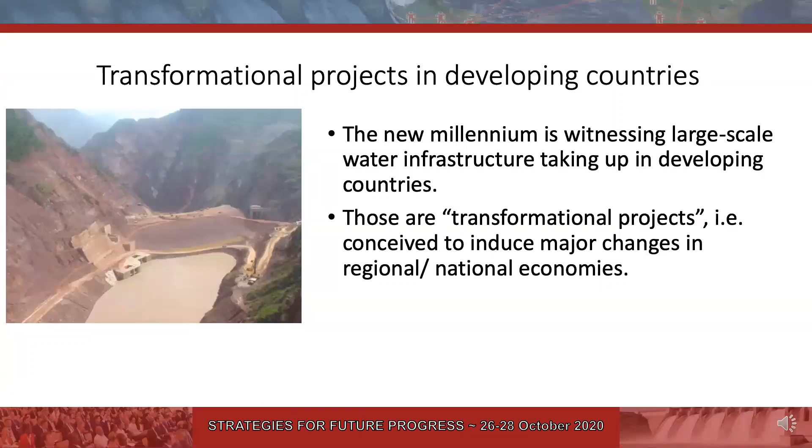To put in context the presentation that we'll hear, I have broadly divided hydropower projects in 3 groups. The first one, I call them transformational projects. Most of you are familiar with them. They are developed in developing countries the same way they were developed in last century in industrialized countries and are aimed at inducing major changes in national and regional economies.

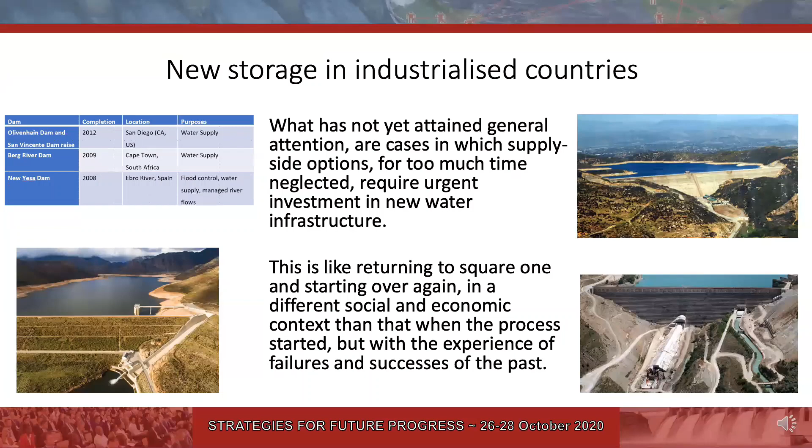Then we have rehabilitation and upgrading projects. These are mainly taking place in industrialized countries which have developed their stock of infrastructure and try to get the most of the existing one and also prolong their life. And the third group is something that is showing recently, although it has not yet attained general attention: new storage, new supply side projects in industrialized countries, after development was much neglected for a long time. We are seeing this happening more and more frequently in industrialized countries.

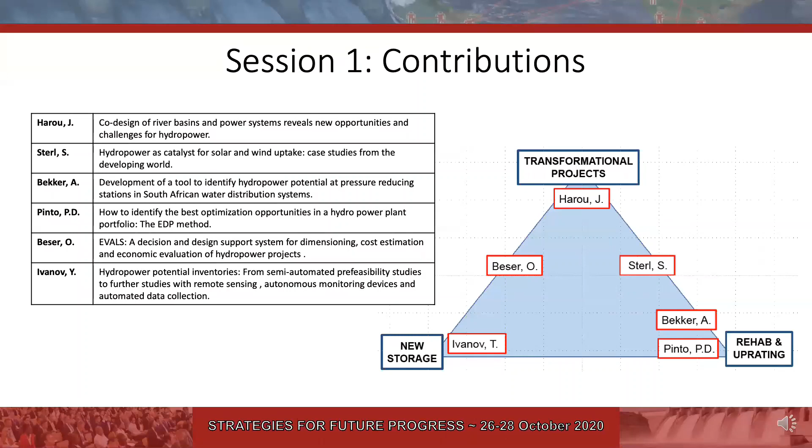And finally, I want to point out that there are other sessions in Hydro 2020 which are relevant to the subject of potential and planning: Session 3 on cross-border collaboration, session 20 on pump and storage technology, and session 40 on sedimentation management. And the relevance of this session is quite clear and is shown in this table. So I look forward to an interesting session and let's get started.

Good morning, and thank you to the organizers of Hydro 2020 for inviting us to give this session's keynote talk on new hydropower opportunities enabled by the co-design of river basins and power systems. My name is Julian Harou, and I'm joined by my co-author, Dr. Mathaios Panteli. We're both at the University of Manchester in the UK.

This work was funded by a UK research project called Future Dams. And Future Dams stands for Future Design and Assessment of Water, Energy, Food, Environment Megasystems. Its website is futuredams.org. Future Dams has 4 case studies in West Africa, East Africa, the Middle East, and Asia.

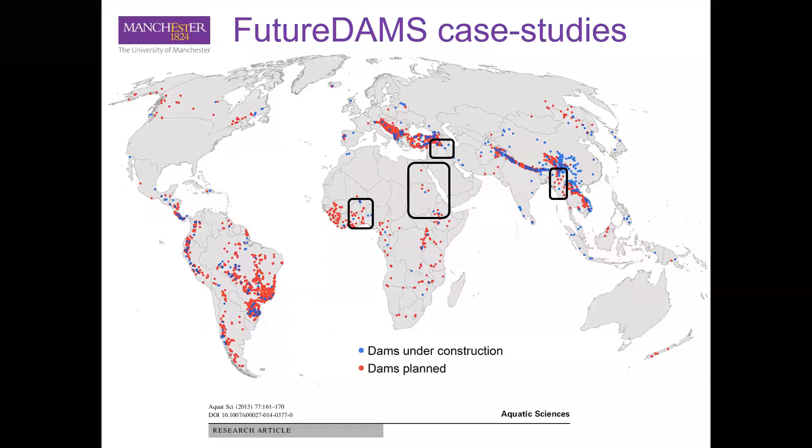So you can imagine by co-design of water energy systems, we're talking in some fashion about integrated water energy systems. Indeed, water and energy are typically managed and planned separately by engineers and planners. And that's also reflected in the mathematical models that are used to manage and plan those systems. For example, power systems models often treat hydropower as a fixed input, and water system models often allocate water to hydropower generation without considering energy needs of the system. So the temporal and spatial synergies of water energy systems are simply not considered in the tools that are used to manage and plan water and energy systems.

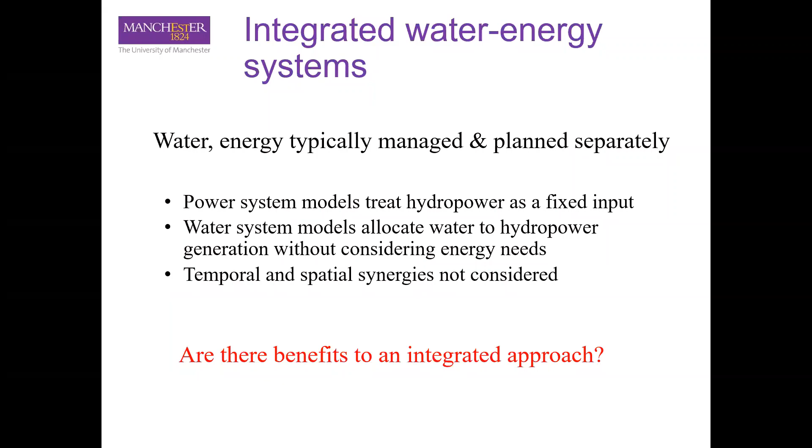So our question is simple: are there benefits to an integrated approach? This integrated approach has 3 steps. The first is to simulate spatially the water and energy system. And that means simulating the water system, the energy system, and their joint interactions. And when we do that, not only track those flows, but also track the engineering, service, reliability, environmental, and economic performance metrics that go along with them.

The second step is search, also called optimization, where we're going to try to find the most efficient water energy designs and operation modes, and the trade-offs that those imply. And you'll see with the results later what we mean by that. The third step is to deliberate, or to collaboratively and interactively assess those trade-offs and help make decisions.

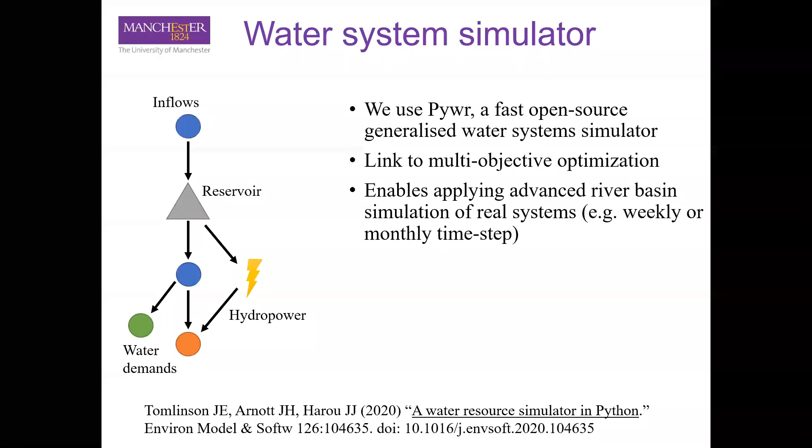Okay, let's look at some of these methods and these simulators. So very quickly, the one that we use for water resource system simulation is called Pywr. It's free and open source. You can get it on the internet. It's very fast and it's a generalized model. It links to multi-objective optimization, which is the search technique that we use. And generally this enables applying advanced river basin simulation on real systems with, for example, a weekly or monthly time step. And there's a paper below there if you're interested.

The energy system simulator is built with a similar tool. It's a fast generalized spatial power system simulator. We've yet to publish this one, but that'll come. It also links to the search. It can simulate in sequential, chronological, or non-sequential simulation. So you can do things like hourly time step, or at a more abstract level, simulate things like representative days. And it can also simulate the unit commitment in power systems.

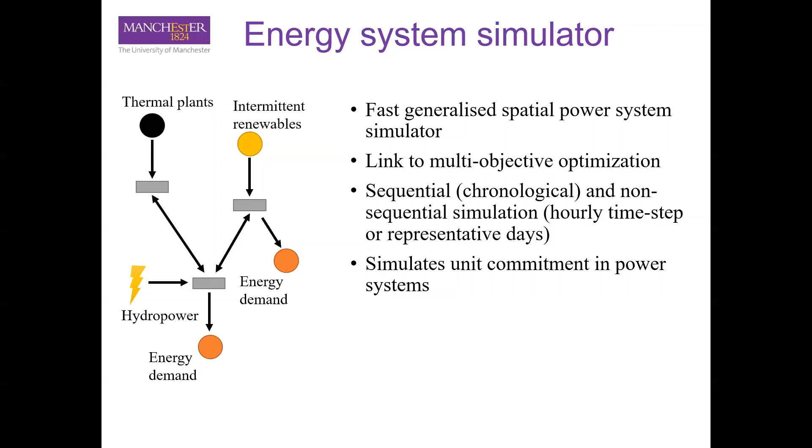Now, how do we join those together? We use an integrated object-oriented software framework that we built a few years ago called Pynsim, which stands for Python Network Simulation Framework. That allows each model to stay independent but connect at runtime while the models run, enabling multi-directional interconnections between the systems to be simulated. There's a paper that details how that works.

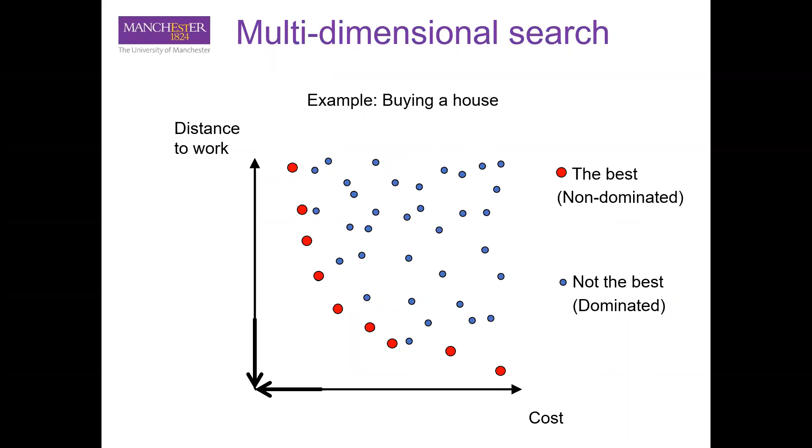This line is showing, for any distance to work, what the cheapest house is. An engineer would call that the non-dominated front, or an economist the Pareto optimal front, or it could also be called simply the best houses. This is the technique of optimization that we use in this project.

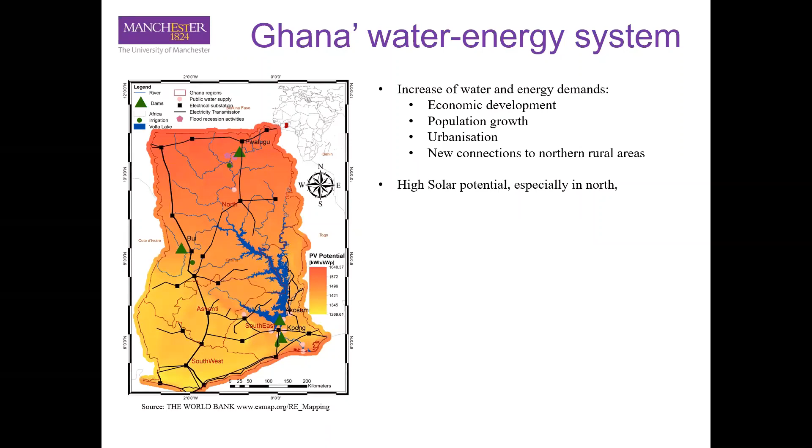An application: we've applied this recently to the Integrated National System of Water and Energy in Ghana. Ghana has some challenges. There's generally an increase in water and energy demand due to development. There's potentially quite a bit of solar potential, but it's especially in the north. The problem is that the demand is especially in the south, where the higher energy loads are. You can see there the water system and the power network in black that we simulate with the simulators.

So our challenge here is simple. The challenge we set ourselves is how to meet future energy demands while producing less emissions than today, and hopefully also lowering costs and increasing service reliability.

So for that, we're going to set up a design problem. The decisions of our problem are where to expand solar, so in which of those grid cells on the left map; where to expand the transmission lines, if at all; whether to expand the thermal generation; and what are the operating rules of the hydropower reservoirs which allow the system to work. The objectives of the multi-objective optimization problem are listed there.

You can see that we're going to be minimizing costs and energy demand unmet. We're going to be maximizing hydropower and firm yield and water supply reliability, for example to agriculture, and including maximizing flood recession agriculture.

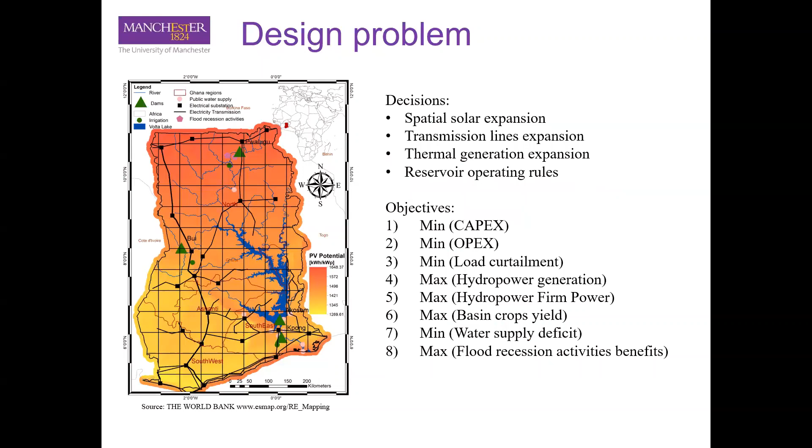Let's look at some of the initial results of this design problem. On the y-axis, we have the emissions reflecting how much thermal is generated. As you reduce that, it's because you're producing more from solar. On the x-axis, we have the hydropower energy produced.

And the color is the firm yield generated by hydropower. The reason why we're not seeing a crisp two-dimensional Pareto frontier is that we have 8 optimization objectives, yet we're looking at this space in 2 dimensions spatially and 1 with color, so 3 dimensions. That's why many of the points are overlapping.

But what we're seeing here is an efficient frontier, so all these points are of interest. To simplify the interpretation, we've tried to keep most of the other benefits roughly equal, but picked a point on the left side with 450 megawatts of firm hydropower, and on the right side, the green point, with 225 megawatts of firm hydropower. What these 2 clusters of points and the 2 selected points show is that there are really 2 ways to operate your hydropower.

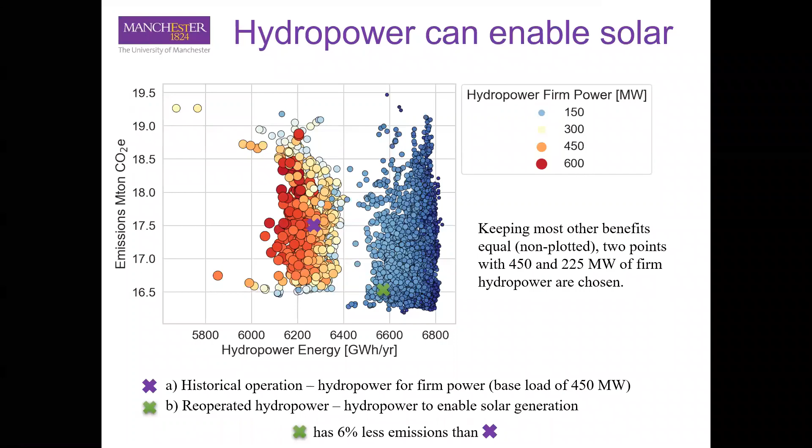The purple point is an example of historical operation, where hydropower is used for firm power to generate base load. The green point is reoperated hydropower, or hydropower that is specifically designed to enable solar generation, to support solar. And you can see here that results in 6% less emissions nationally.

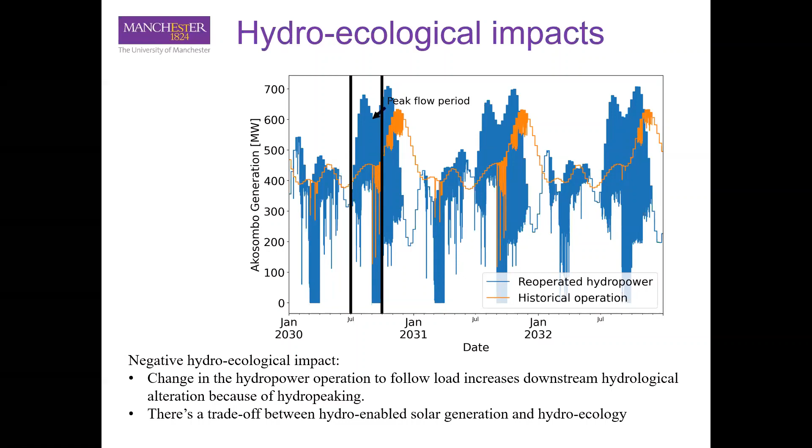In summary, we can say that hydropower allows moving water in time to respond to changes in the net load and solar availability. Such hydropower reoperation enables more solar and less thermal generation and reduces CO2 emissions. In our case, in Ghana at national scale, this was about 6%. However, so far we've seen there's an emissions reduction versus hydrological alteration, or hydropeaking, trade-off that needs to be considered and further looked into.

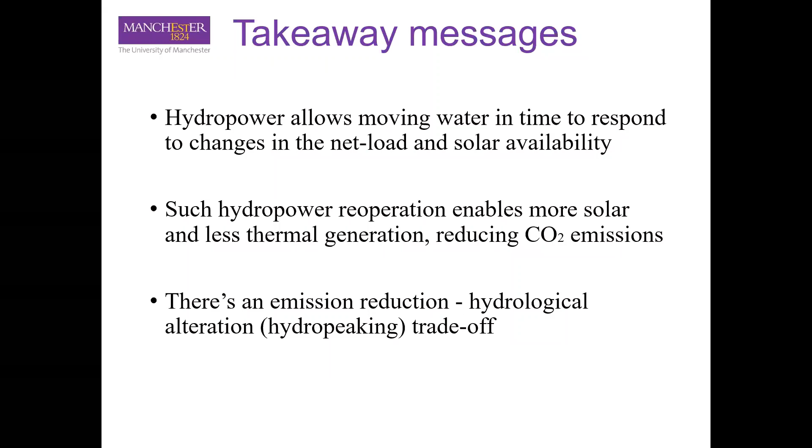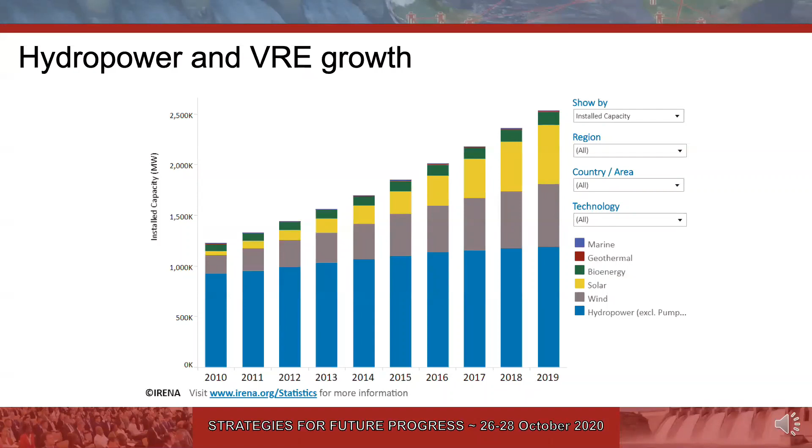To give you some context, hydropower, as many of you will know, is the most used renewable electricity resource in the world, but solar and wind power have been making tremendous advances in recent years with unexpected and unprecedented growth rates. Now that is good news for the climate, but it comes with its own challenges because these resources are variable and fluctuate depending on the weather from minute to minute, hour to hour, and season to season. Hydropower has often been presented as a way to compensate for these variabilities thanks to its flexibility of dispatch.

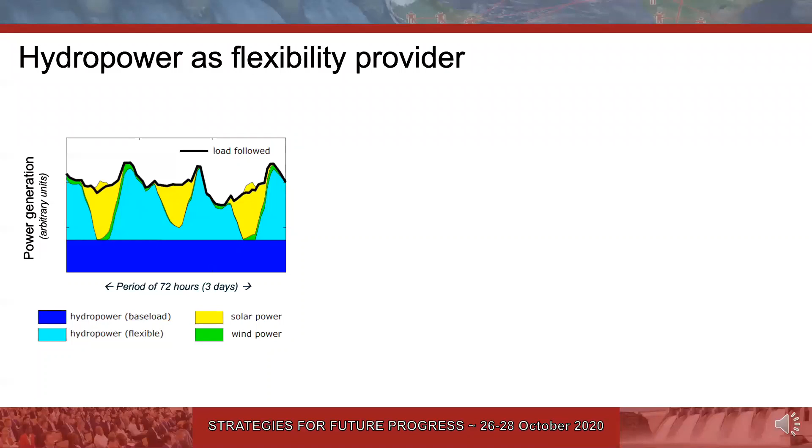Now, that on the face of it, may seem like a relatively simple thing. Just adapt the operation of hydropower plants according to the availability of solar and wind and according to the demand, and you're there. But it's not that simple. It's about more than just considering the hourly weather patterns and adapting hydropower plant operation in function of that.

Because in reality, you'll need to consider a whole range of other scales and problems to do this in a proper way. For instance, you'll need to consider also the impact of seasonality, of rainfall, of river discharge, but also of solar and wind potential on the management of hydropower plants and their flexibility, as well as the climate change signal, which pans out on decadal timescales.

Moreover, it's important to consider the environmental flows that hydro reservoirs have to guarantee in order to safeguard ecology downstream, as well as the multi-annual management strategies of reservoirs to safeguard lake levels. So quite quickly, this can become a relatively complicated problem that requires a lot of data in order to be analyzed properly. So in the department where I work, we've developed software tools to do this, and I'm going to show you the results of two specific case studies that we've carried out, which consider all of these timescales and problems in an integrated manner.

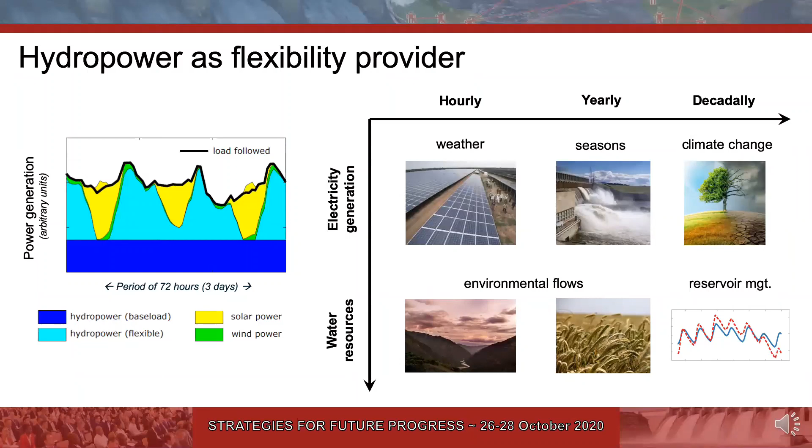The two case studies I'm showing you actually span a wide range of grid scale relevance, and they're from opposite ends of the spectrum in terms of grid size. The first case study is from an isolated island grid case, a grid that stands on its own without interconnections to other countries in a small island developing state. The second case concerns an interconnected power pool strategy across an entire subcontinent.

The first case study is from the South American nation of Suriname, a small island developing state. The second case is from West Africa, in the context of ongoing efforts to integrate national power grids into a joint West African power pool. Let's start with Suriname.

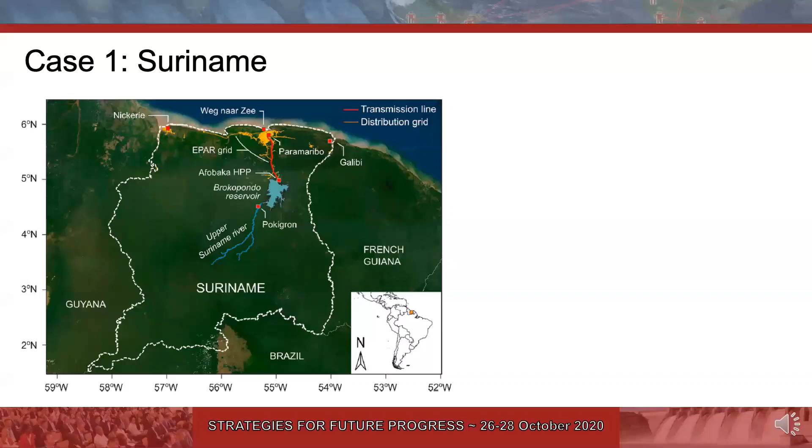Suriname is a small country along the northeastern coast of South America, which has historically relied on a mix of hydropower from a single big hydropower plant and thermal power from several diesel-powered plants. The main grid of Suriname, which serves the capital, Paramaribo, is isolated and has no interconnections to other grids. The hydropower plant was originally developed to benefit the aluminum industry, but as this industry declined, the plant was handed over to the Surinamese state at the end of 2019.

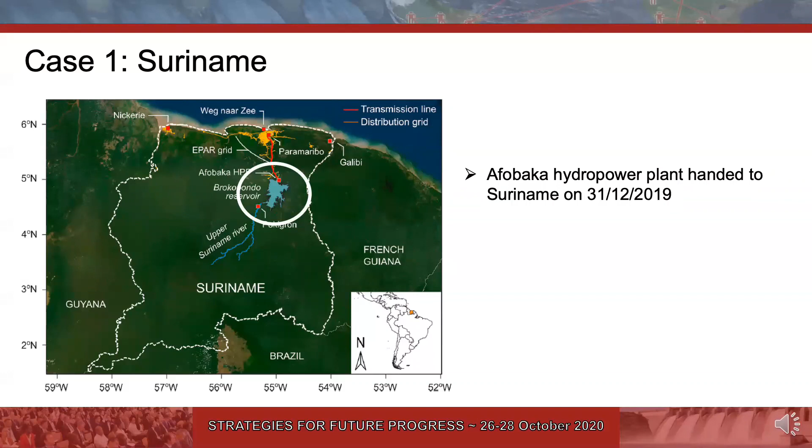So Suriname now has a new old hydropower plant in its possession, which could be put to use to benefit a clean energy transition. In collaboration with the National Utility Company of Suriname, we looked at the potential for using the hydropower plant, leveraging its flexibility to develop coastal wind power. The coastline of Suriname receives strong trade winds during part of the year, and most of the population lives there, so the transmission grid is already present along the coast. There could therefore be interesting ways of using the hydropower plant to develop coastal wind power.

It's interesting to note the complementarity between the wind and the hydro resource in the country. Wind speeds blow strongest during the dry season at the beginning and the end of the year. Obviously, the hydropower potential is highest during the wet season when the reservoir refills. So we have a very clear case of seasonal hydro-wind complementarity here, which could be leveraged to benefit the introduction of wind power on the Surinamese grid.

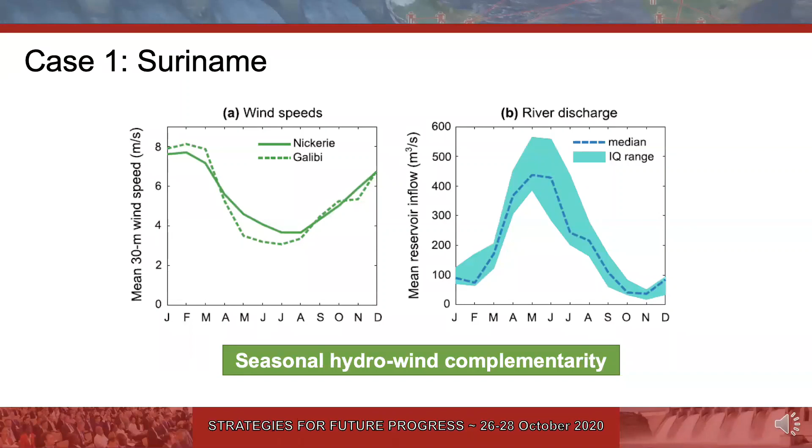Here I show you model results of how the operation of a mix of hydro, wind and thermal power to meet Surinamese demand could look like from hourly to seasonal to multi-annual scales. On an hourly timescale, our model suggests that the hydropower plant should be dispatched in certain ways, depending on the availability of wind and the total demand, in order to displace thermal power from the mix.

If you keep that operation across the year and across several years, then on a seasonal timescale you'll see that you reproduce exactly this complementary behavior, with wind power reaching up to 50% penetration during the dry season and hydropower taking up the baton during the wet season. On a multi-annual timescale, we see that the hydropower plant is even capable of compensating for interannual variability in the wind resource.

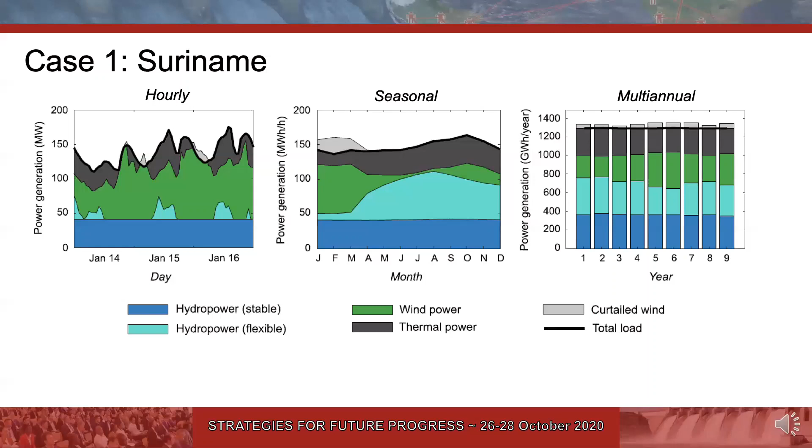After doing some economic analysis on this, we find that hydro-supported integration of wind power is economically advantageous up to around 25% of wind power penetration on Suriname's main islanded grid, which together with hydropower would mean roughly 80% renewable and clean electricity supply for the country.

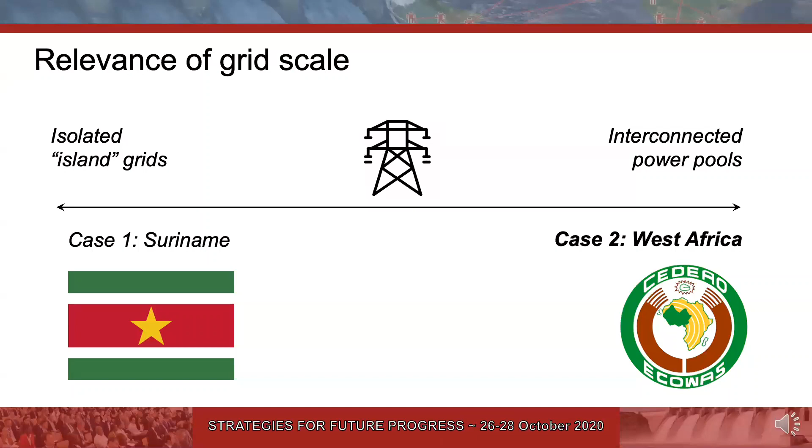The second case I'm going to show you now concerns a whole other scale of grids, namely interconnected power pooling across an entire subcontinent. The aim of this research was to look at how the ongoing efforts to integrate countries' national power grids into one regionally integrated West African power pool could best be harmonized with the need to deploy more and more clean energy projects from solar and wind power in the region to reduce the use of polluting fossil fuels, and how this could best be harmonized with the potential flexibility of the existing and also the planned hydropower fleets across the region.

So we used the same modeling approaches as we did for Suriname, but instead of applying them to one single hydropower plant and one single type of wind power project, we actually looked at the entire subregion and simulated the joint operation of all existing and planned hydropower plants alongside all upcoming solar PV and wind power plants in the region, to clarify how a regionally integrated power grid could benefit high penetrations of solar and wind power and the deployment of flexible hydropower.

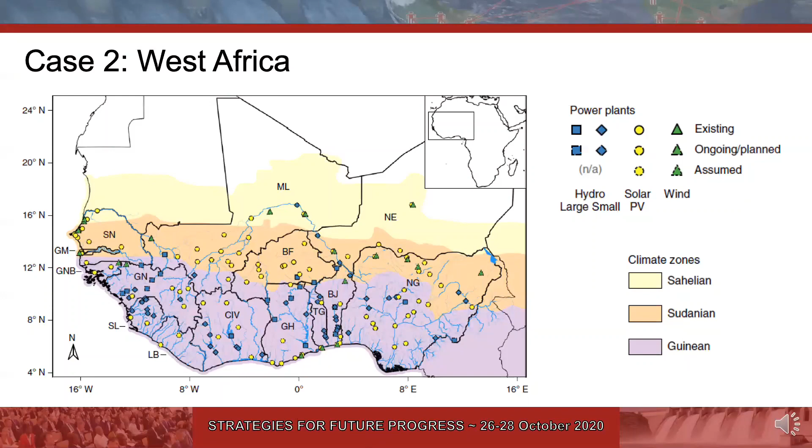And in this case, we saw that there were a whole lot of other synergies and complementarities that had to be considered. In the Surinamese case, we have one type of synergy, seasonal, between two types of resources, hydro and wind. In this West African case, there's a whole other range of synergies to be considered. We've got a seasonal synergy between hydro on the one hand and solar and wind on the other, with solar and wind power strongest during the dry season, hydropower obviously during the wet season.

We've got a diurnal synergy between solar on one hand and wind power on the other. Solar power is obviously available only during daytime, but wind power potential is actually highest during nighttime in West Africa because of low-level jets that blow at the hub heights of wind turbines.

And lastly, we've got a spatial synergy between the north and the south of the region, with hydropower potential mostly concentrated in the wet south, which receives the most rainfall, and solar and wind power potential being strongest by far in the northern, dry part of West Africa. So we could say that we are dealing here with a case of multi-scale spatio-temporal hydro-solar-wind complementarity.

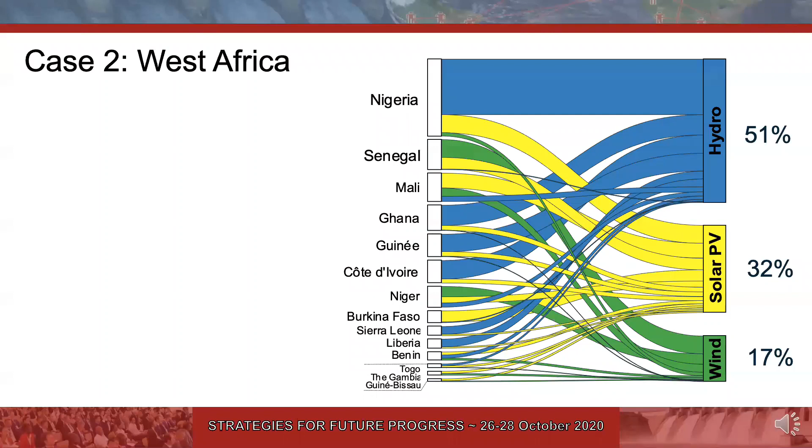So a mix of renewable electricity resources with roughly 50% hydropower and 50% VRE, which we find could meet more than 60% of current electricity demand in West Africa if countries could share these resources on an integrated power grid. So a regionally integrated power grid allows for efficient leveraging of VRE potential, and therefore we would support that such considerations are taken up in the ongoing planning towards the West African power pool.

We find that existing and smartly planned new hydropower can play a strong role as a guardian of the grid, in order to safeguard grid stability and compensate for solar and wind power variabilities. And for all of that, integrated resource planning of solar, wind, and hydro together is crucial.

We also find that with the expected drop in costs of solar and wind power across the next decade, such strategies may become cheaper than the status quo in West Africa, which is mostly a combination of hydro and thermal power.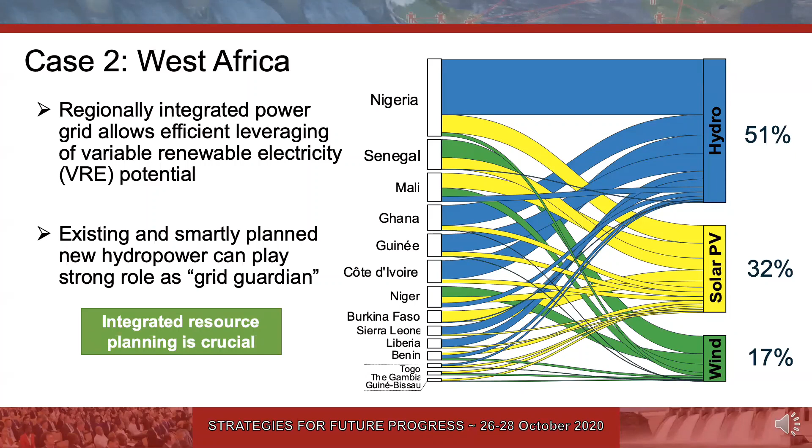And we believe that this would constitute an extremely interesting case in the framework of planning power grids from the start, based on the idea that they should be designed for renewables, which is an opportunity that Europe and the United States have never had. This would be an opportunity for West Africa to leapfrog the age of fossil-based, large-scale integrated power grids, in order to plan for power grids that are designed for renewables from the outset.

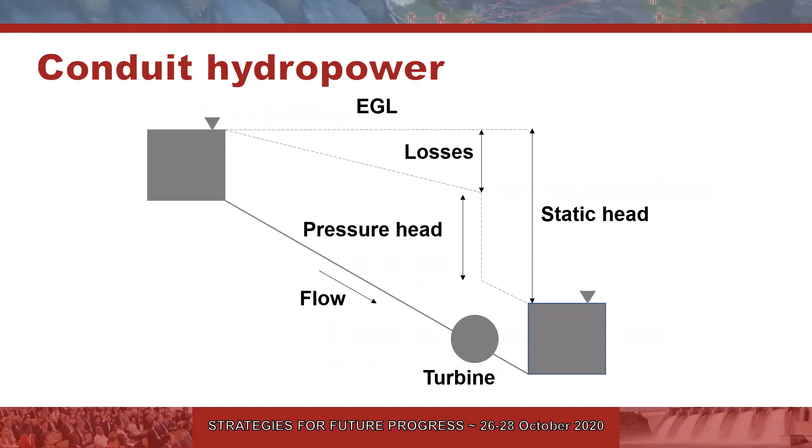So just a brief introduction into conduit hydropower. Water distribution systems often have hidden potential for hydropower generation at pressure-reducing stations, where excess pressure can be utilized for energy generation instead of being dissipated. The utilization of the excess pressure can be achieved by either replacing the pressure-reducing valve with a turbine, or by installing a turbine in parallel with the existing PRV.

South Africa has some existing conduit hydropower plants, of which some examples include the Pierre van Ryneveld plant with an installed capacity of 14.9 kilowatts, the Brandkop Reservoir with an installed capacity of 96 kilowatts, and the Annlin Reservoir with an installed capacity of 150 kilowatts.

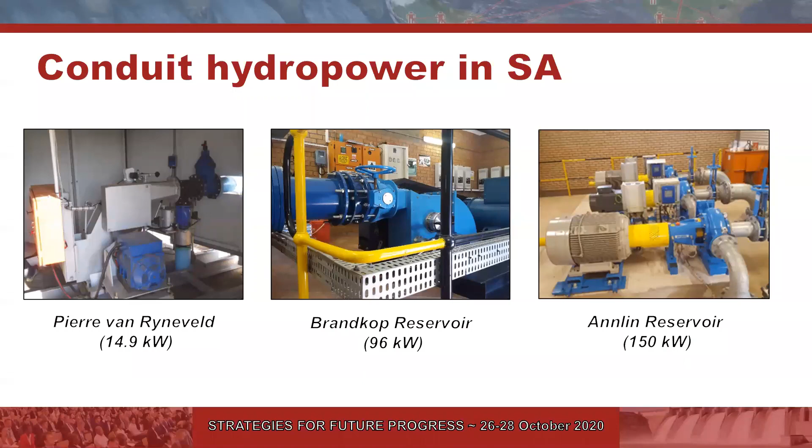The remainder of this presentation describes the proposed methodology for the development of an evaluation tool. The aim is to assist in the quantification of a first-order estimate of the hydropower potential available at pressure-reducing stations or break pressure tanks, especially where restricted access to data poses a challenge. There are five steps included in the proposed methodology, but only the first two will be discussed here. The first step is reviewing existing data or studies describing the evaluation of conduit hydropower. The second step is finding suitable methods of estimating flow and pressure head when limited data poses a challenge.

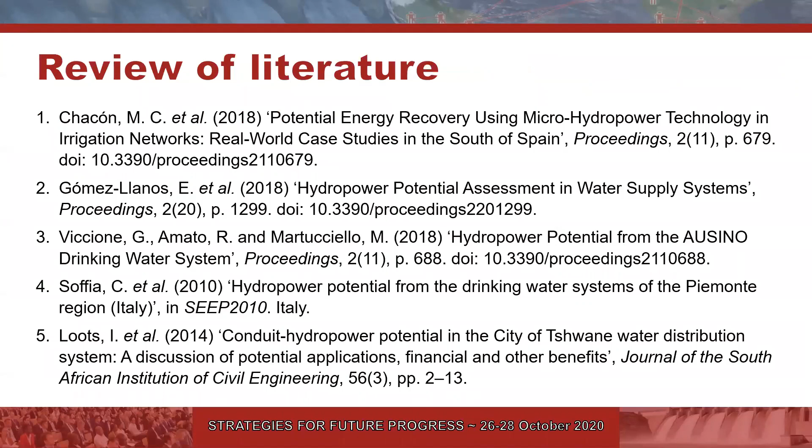These are some of the selected studies on the evaluation of hydropower potential at break pressure tanks and pressure reducing stations, assessed with the aim of finding existing methods of evaluating hydropower potential in water distribution systems. Even though quite a few studies described such methods, there was a general lack of studies dedicated to the quantification of hydropower potential or hydropower parameters using limited data.

This brings me to the next part of the methodology, which is finding suitable methods of estimating parameters. As mentioned, there aren't any studies dedicated to finding methods of estimating parameters when limited data poses a challenge. The aim of this step is to make certain assumptions or apply certain criteria to estimate the parameters necessary for hydropower potential quantification. In the case of conduit hydropower, the two parameters that need to be estimated are flow and pressure head.

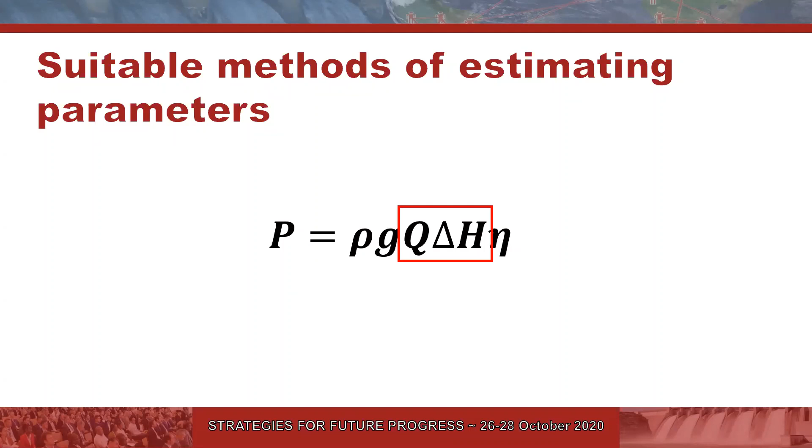First, I will discuss a suitable method of estimating the parameter flow. If hydropower potential quantification is required and the flow parameters are unknown, there are two ways of estimating the flow. The first is to assume the flow to be equal to 55% of the PRV size. This value was obtained during a study to find the relationship between the PRV size and the flow through the PRV, using data from a number of South African reservoirs. Option two is to assume the flow velocity in the pipeline to be equal to 1.5 meters per second.

There are, however, some limitations to this. What happens if you have a more complex system? For example, if you have two reservoirs that aren't connected with a single pipeline, there might be multiple pipelines between the two reservoirs, or there might be some flow abstractions or even incoming lines along the system.

Next is to find a suitable method of estimating the parameter pressure head. During this estimation, five scenarios were considered. Scenario 1 is where basically all parameters are known except the pressure head, so the location, static head, length, and diameter of the pipeline are all known. Scenario 2 is where only the length of the pipeline is not known - that's the difference between scenario 1 and 2. Scenario 3 is where only the location and diameter of the pipeline system are known. Scenario 4 is where only the static head of the pipeline is known. And scenario 5 is where no information is available.

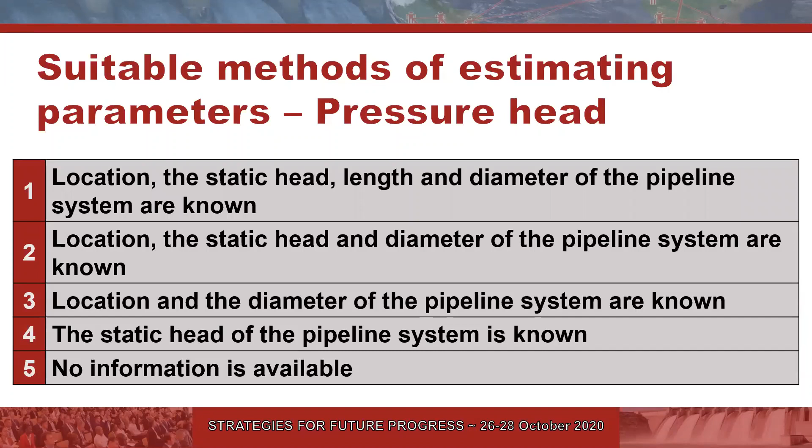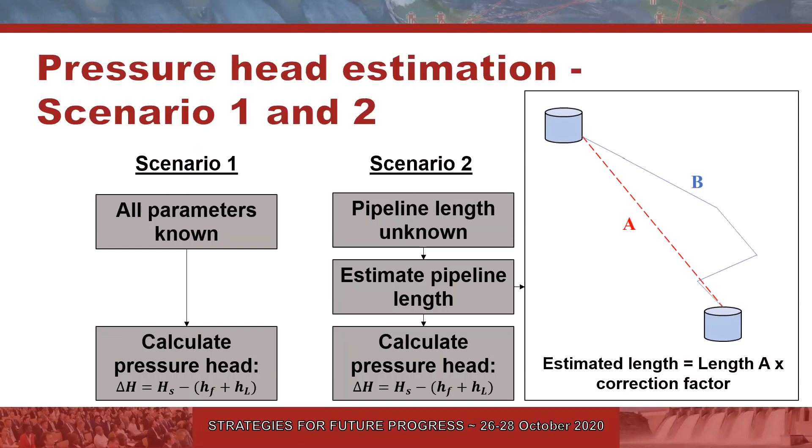Let's first look at the pressure head estimation of scenarios 1 and 2. Scenario 1 is quite simple - all parameters are known, so the pressure head can be calculated by subtracting the losses through the system from the static head. Scenario 2 follows the same path, but the length of the pipeline is unknown. The proposed methodology for estimating the pipeline length is to obtain the direct length between the two points, length A, from a digital elevation model of South Africa, and then apply a correction factor to get the estimated length B. After which the pressure head is calculated using the same formula as scenario 1.

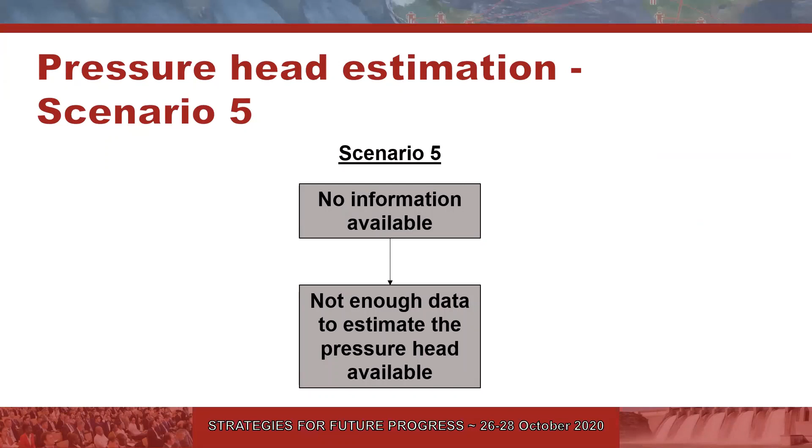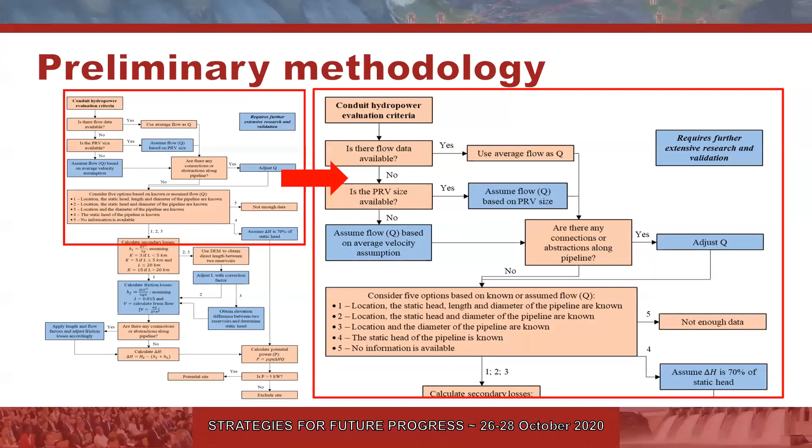So this brings me to the conclusion of the study. A conduit hydropower evaluation tool is being developed to assist in the quantification of hydropower potential. And the first steps in developing such a tool were finding methods of estimating the flow and pressure head when limited data poses a challenge. So this tool is still in its infancy phase of development, and a lot of the criteria and assumptions still need to be validated, but it is believed that such a tool can assist with the quantification of hydropower potential, especially when limited data poses a challenge.

And currently, the data of 10 additional sites are being analyzed to find some of the correction factors that have not been found yet, or even to validate some of the criteria that have already been included in the framework.

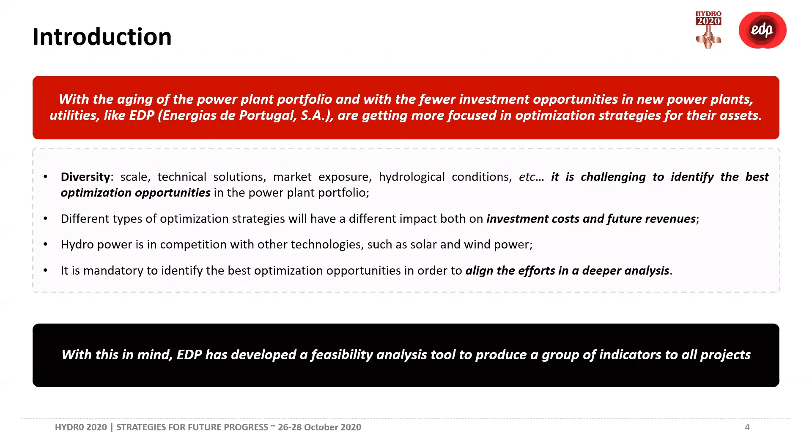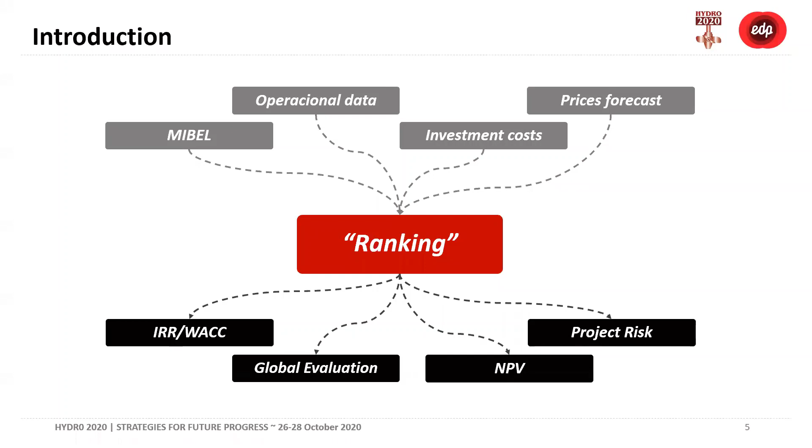The ranking is a tool that uses databases such as MIBEL prices, operational data, investment costs, prices forecast to produce indicators that will help us to decide the best projects. These indicators are the ratio between internal rate of return and the cost of capital, a global evaluation, the net present value, and the project risk.

To calculate the indicators, we would say that we need 5 steps. The first one is the project description. Then we have the introduction of the investment costs, the intervention period, the estimated optimization, percentage or power, and the quality assessment. After that, we have the algorithms. The algorithms will update the databases, will calculate the indicators, and finally, we will have the ranking of the projects.

Moving next, we have the project's feasibility, data, and methods. Here we have the 4 databases. The first one is the MIBEL prices, and the MIBEL prices are coming from a market operator for the Iberian Peninsula, which is OMIE. We use the day-ahead data. This is hourly data since 2010. We have a weighting factor that puts higher weight in the recent years.

Second database is the operational data. It's an internal database. We use data from the last 5 years. We consider that the last 5 years are appropriate for this kind of analysis. We use variables such as head, flow, and power. And once again, we use hourly data.

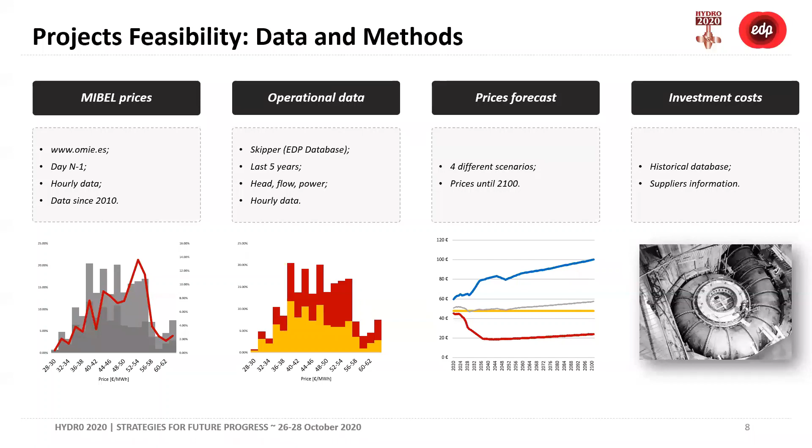So the price matrix has 24 hours and 12 months. So this means that we have a price for each hour within a month. This price matrix is created with the data from MIBEL, the last 10 years, like I said before. And we consider this as average prices.

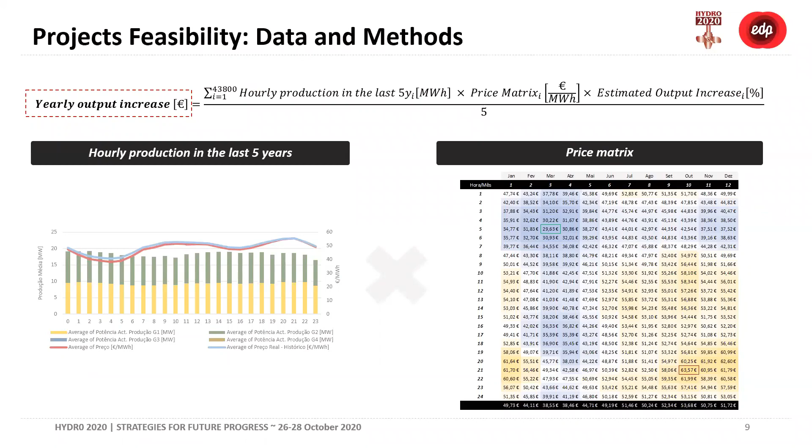As we've seen previously, the estimation for the yearly output is defined for the initial moment. For the following years, we need to update them according to perspectives on prices. For that, we have 4 different scenarios marked here on this graph. The official scenario in terms of comparison between projects inside EDP Group is the energy outlook conservative. We have also 3 other scenarios. The yellow one, which is a constant evolution of prices.

The red one, which is based on forecasts of future generation, and another scenario that is the average of the last three scenarios. This data shown here is for demonstration purpose only. This is not real data. And we are able to select which scenario we want to have for our simulation, and our indicators will be calculated based on the selected scenario.

Every project under analysis will have a detailed report with a description of the project and other relevant data. We have classified this data according to three different categories: revenues, investment and losses, and quality indicators. For the revenues, we have the type of optimization that we want to implement. I will address this later. The expected optimization increase, the new minimal and maximum power of the unit, and the number of units to be optimized. On investment and losses, we have the investment costs, the project development time, and the outage time.

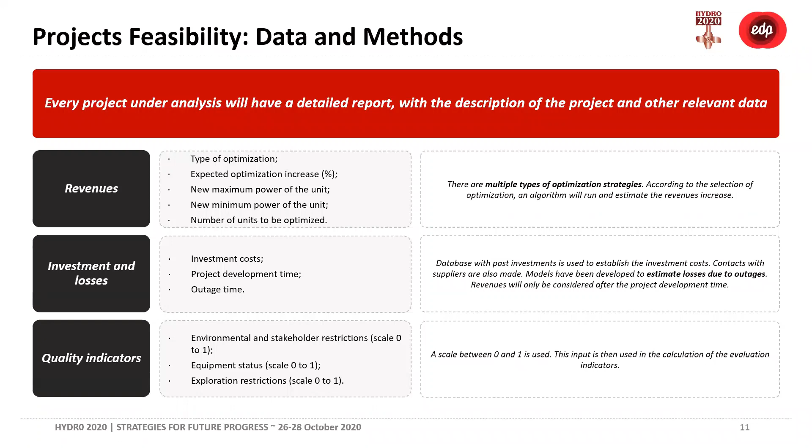Regarding the types of optimization strategies, we have developed until now 10 different algorithms for each one of the strategies listed here. As an example, we have here the pump efficiency increase, and as I have said before, the algorithm is based on the general equation. So, for the pump efficiency increase, the yearly output increase is calculated based on the hourly production of the last 5 years, multiplied by electricity prices from the price matrix, the estimated pump efficiency increase, the turbine efficiency, and a ratio of the pump consumption and the turbine generation over the last 5 years.

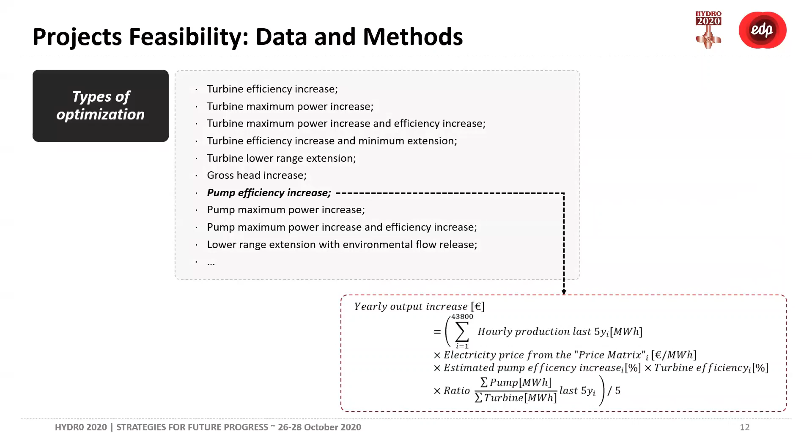And going next to the results. As we have seen before, we have 4 main indicators. The first one, the ratio between internal rate of return and the cost of capital. We will consider only projects with ratios higher than 1.4. The global evaluation is an indicator that uses an economic indicator, a time indicator, and a qualitative indicator. And we will choose the projects better classified with this indicator. The net present value: we will choose projects with higher net present value regardless of the payback time.

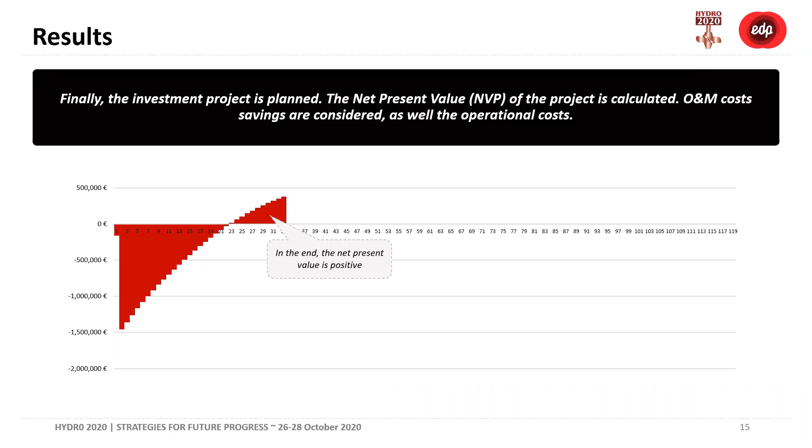And finally, we have the project risk. This is a relative assessment method where we will compare the investment costs with the average investment costs of a group of projects. The same for the revenue losses, the same for development time, and the same for the remaining concession time. The investment project is planned. We calculate the net present value over the years, and we expect that in the end this value is positive. We also consider all O&M cost savings and also operational costs.

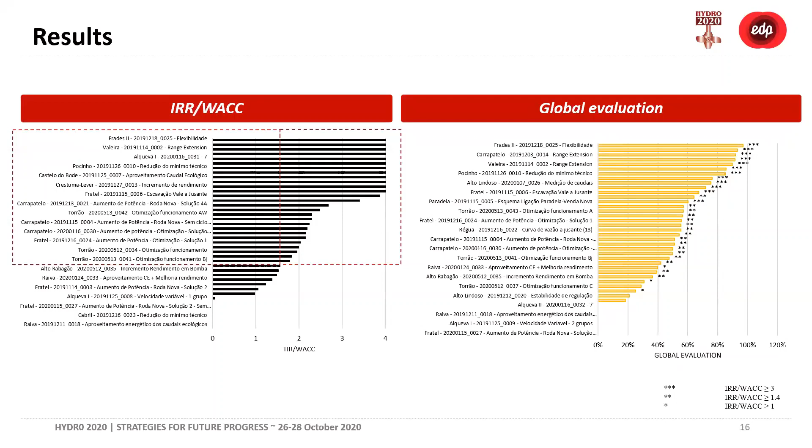For the final remarks, we would like to say that this framework has the purpose of simplifying the preliminary project feasibility analysis. This ranking forecasts both costs and future revenues. To evaluate the feasibility of the projects, we take into consideration the net present value, the ratio between the internal rate of return and the cost of capital, the project risk, and a global evaluation of the project.

Projects with ratios higher than 1.4 are preferable, and for the time being, we have on average net present values of 6 million euros for our projects. One project of 1 million euros has been developed. We also know that there is still margin for further improvements related to the other types of optimization projects. We also know that the allocation of the investment costs and revenues over the years may be perfected to allow a more accurate calculation of the financial results.

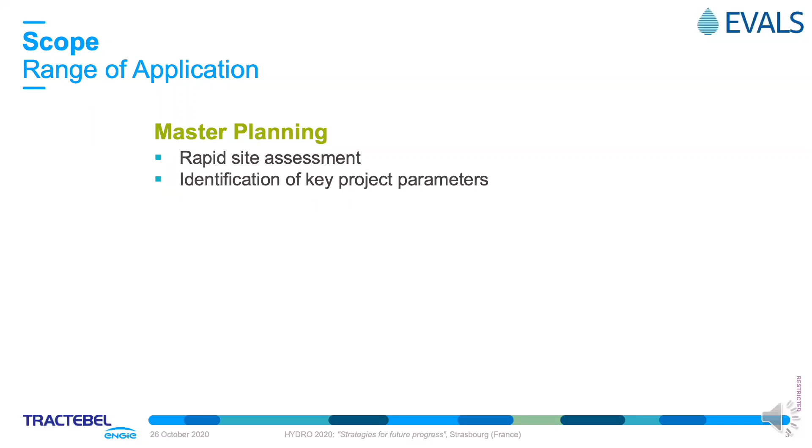For master planning, EVALS can be used for rapid site assessment and to define and refine key project parameters at an early stage. EVALS can be run for site selection and assessment of general layout alternatives during pre-feasibility studies. EVALS can determine key layout aspects and pre-optimize specific structures for feasibility studies. The application of EVALS in master plans, pre-feasibility studies, and feasibility studies significantly improves the efficiency of the engineering services.

The identification, development, and comprehensive assessment of candidate hydropower schemes requires a systematic, yet time and cost-effective approach. To ensure the compatibility of results, costs and benefits for individual candidate projects must be based on standard design criteria, as well as on standard procedures for cost and benefit estimation and project evaluation.

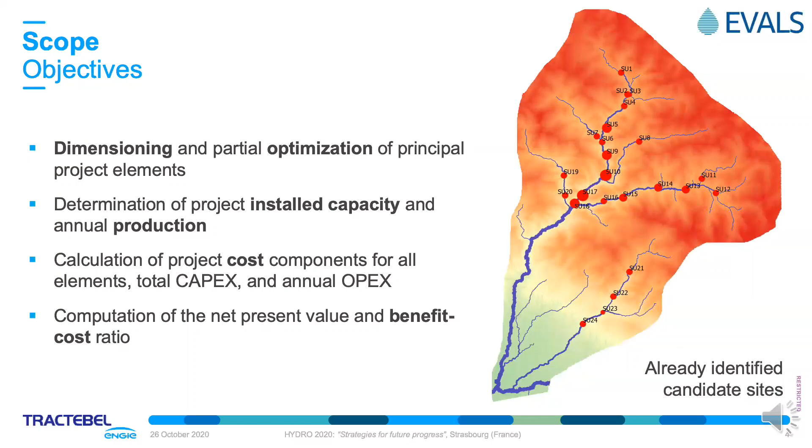For each candidate site, design of principal project elements is required. The planning engineer has to determine project installed capacity and calculate annual production. The cost for each element, total CAPEX and OPEX, has to be calculated. The planning engineer has to compute the net present value and benefit cost ratio. The decision makers should find answers to the following questions for each candidate site.

What are the possible layout alternatives? Layout on the left bank like alternative A or right bank like alternative B. Select penstock or pressure shaft. What will be the dam type? RCC, rock-fill dam, earth-fill dam, or concrete gravity? Where should we locate the dam access? What will be the dam height?

For each alternative, what is the optimum installed capacity? Will it be a reservoir, run-of-river, or peak run-of-river type project? Finally, which alternative to select for each candidate site? Afterward, candidate sites should be ranked so that the most promising sites are selected for the short-term, mid-term, and long-term investment plans.

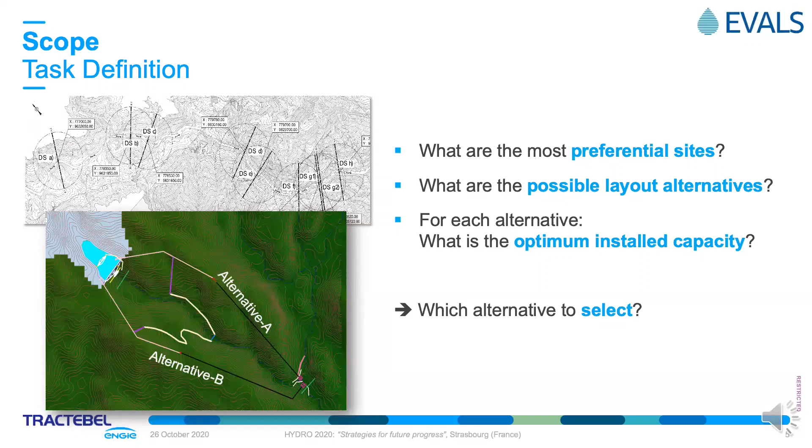The latest version of EVALS is a standalone GIS-based desktop application developed for the Microsoft Windows operating system. It is user-friendly and intuitive, so you can quickly focus on engineering. It dramatically streamlines your workflow. It can be easily integrated into existing decision support systems. Its plugin architecture allows extending its application range.

With the recent version of EVALS, you can prepare layouts inside its standalone high-performance GIS engine, with which you can also read and write more than 100 different formats. You can place more than 20 different common hydropower elements, such as dams, spillways, weirs, cofferdams, diversion tunnels, headrace tunnels, forebay, surge tank, penstock, pressure shaft, powerhouse, transmission lines, and more. You can create different layout alternatives for a project.

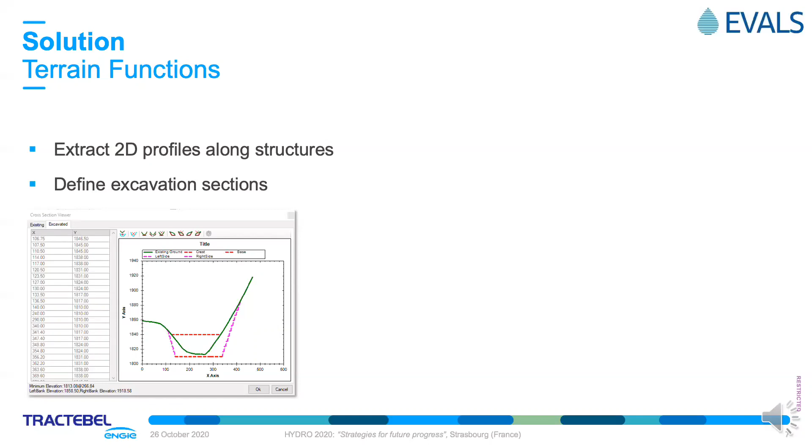The recent version of EVALS, with the GIS engine at its core, has a comprehensive set of streamlined terrain tools such as 2D profile extraction along elements, and excavation cross-section definition based on baseline and catch line parameterization. As you can see in the figure, you can define catch lines with benching and dynamically see the results on screen. Cut and fill calculations can be done on defined excavation cross-sections.

Some other terrain functions are automatic basin delineation for a selected point, automatic river network creation with Strahler numbers, calculation of the hypsometric curve for a basin, and calculation of reservoir boundary and capacity curves.

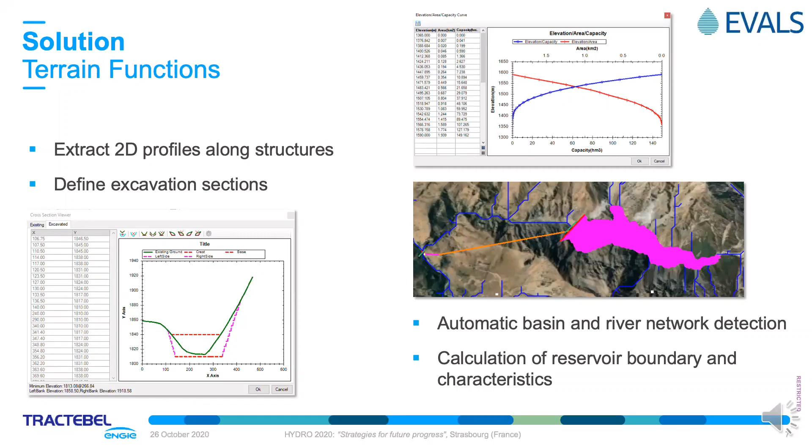Dimensioning of elements is achieved by applying parametric design approaches. Design parameters are stored inside an engineering library where each parameter can be modified and designs are simultaneously updated accordingly. Hydraulic calculations such as flood routing, water profile, and water hammer calculations are run wherever necessary.

Accurate bills of quantities are calculated with the help of constructive 3D solid modeling approaches, which also create an interface to CAD and BIM. Users can visualize designs on the fly in a 3D environment. Here you can see a designed dam with an integrated spillway over existing ground and an excavation cross-section in 3D.

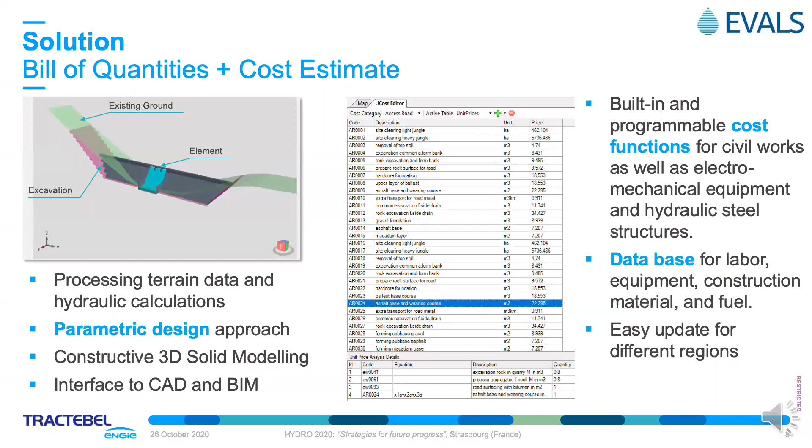EVALS cost estimates are based on unit prices defined within the UCOST database. The unit prices are the outputs of built-in programmable cost functions, so it is easy to update UCOST to different regions.

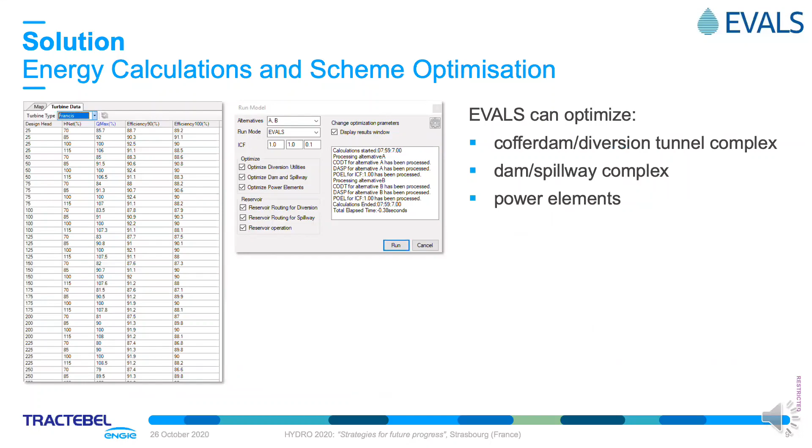During a run for selected alternatives, EVALS can optimize diversion utilities, dam and spillway complex, and power elements. EVALS performs reservoir operation calculations to determine peak and off-peak power, to compute firm and secondary energy using head discharge turbine efficiency curves, to maximize the value of energy while satisfying downstream water demands, and to indicate minimum, average, and maximum filling times.

EVALS has separate outputs and reporting interfaces where you can export results to common formats such as Excel and CSV. For each element, detailed BOQ tables and calculated design parameters are reported.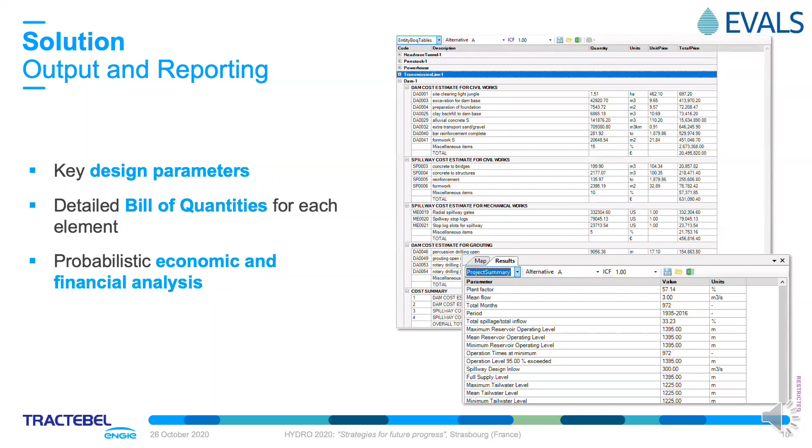Some other standard outputs are optimization results details, reservoir filling and operation simulation, and preliminary probabilistic economic and financial analysis.

As a summary, EVALS is a GIS-based design and decision support system that streamlines the economic assessment, technical definition, and identification of alternative layouts. Thus, it helps to optimize potential hydropower projects.

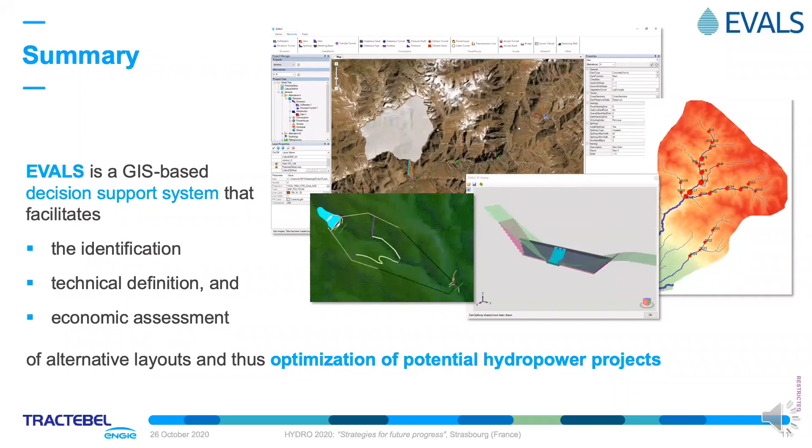EVALS enables the planning engineer to spend less time on tedious calculations and reporting and put more focus on his creative conceptual work and adding value to the project.

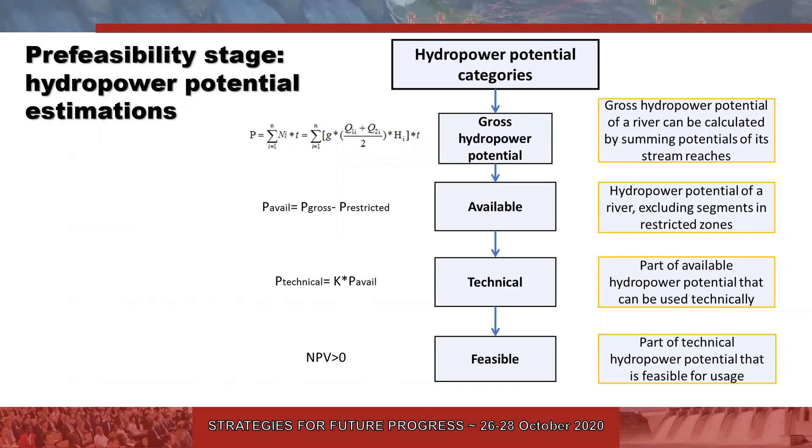If we start with the hydropower potential, on this slide you can see what is understood under hydropower potential, what is available hydropower potential, what you can technically use, and what is economically feasible.

Hereby you may see how the algorithm to estimate hydropower potential actually works. It consists of collection and processing of data of two types. One is terrain data that allows you to create so-called synthetic rivers, which are mathematically derived rivers that would flow if you just consider the digital elevation model and how the water would follow this terrain.

The second set of data is related to hydrology, and the regular approach is the so-called runoff module maps, which have characteristics of liters per second per square kilometer of the watershed area, with the annual figure of discharge for these characteristics per area. So we've developed it a bit further, but I don't have time to stop here.

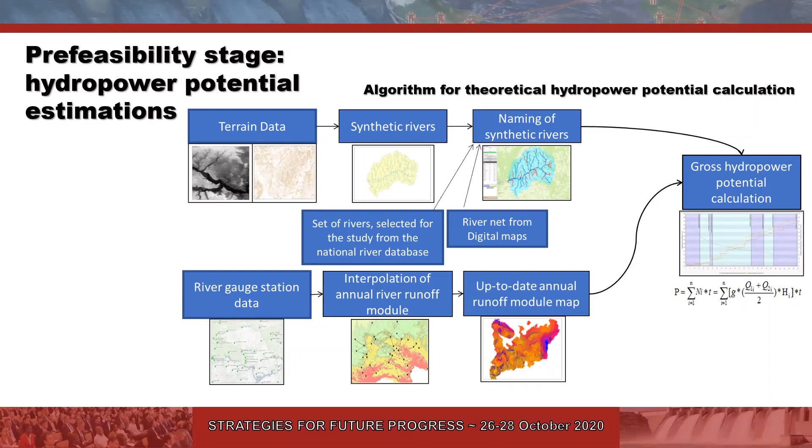So using these two types of data, you analyze river segments section by section and then go from up to down to calculate the gross hydropower potential. After calculating this gross hydropower potential, it is also important to understand where you can use it.

Depending on the territory, these criteria could change, and for Russian territories, what we've applied was analyzing which territories are national parks and other ecological restricted zones, where hydropower potential has already been used, like reservoirs that have already been created, or some territories that are extremely unfavorable for geological conditions.

So having this data, you may select the synthetic or mathematical rivers and subtract them from further estimations. This allows you to automatically calculate the available hydropower potential.

What is also important is verification of results. When you have your mathematical model and some estimation of characteristics of the rivers, it is important to compare the results with previous studies so that you find any errors in advance before proceeding further.

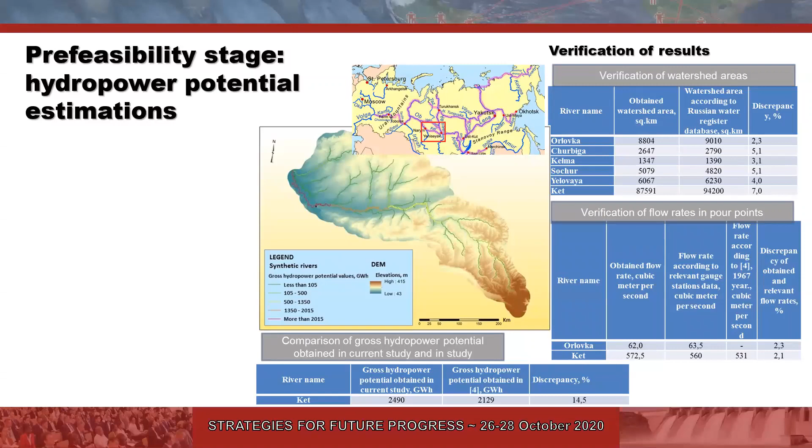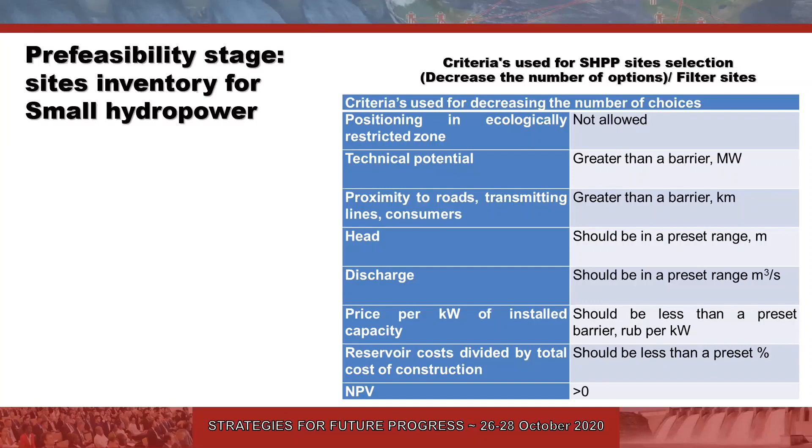So this is some criteria we have been using for our search of small hydropower plants, and we were using the same parameters to narrow the search further, to have some filters in our system.

In order to apply the described methodology, of course, you need some initial data. Here is the list of data that you need to collect in order to make these tools work. And more or less the same list of data we've managed to collect not only for Russia, but also for Cuban territory, and the method actually worked quite fine.

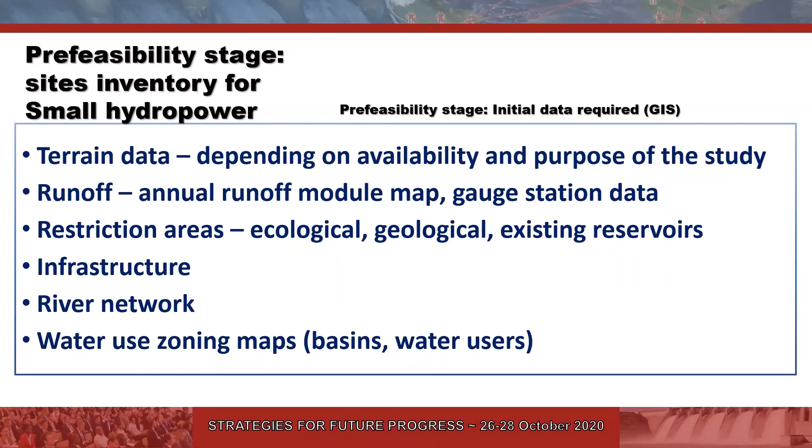So you start from the terrain data and runoff data to provide the possibility to estimate hydropower potential. Then you add restriction areas to narrow your search where you cannot build for sure. And then you add infrastructure to locate the sites close to cities and possible consumers. Also you will need river network and water use zoning maps, because this is our field where we are working.

So to develop all the above, we found it practical to use a geographical information system which is server-based, and to create separate applications for specialists of different fields. Then, using these applications, the specialists work on their own data, but this data becomes available for everyone else, and this creates a huge synergetic effect.

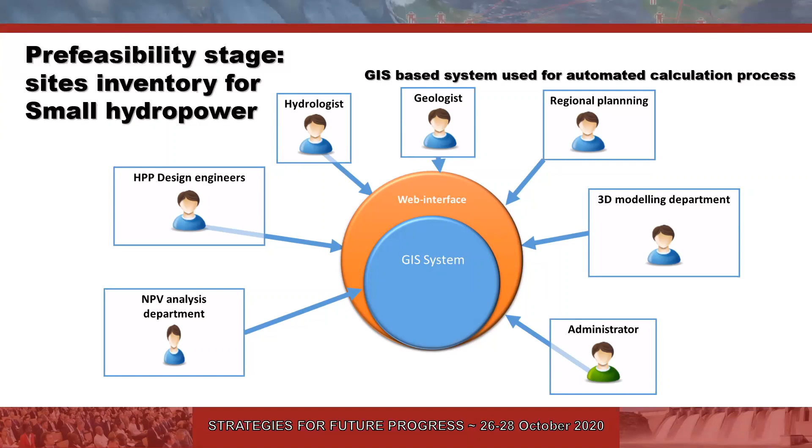So when you need to proceed further, and you already have some sites found, we start to cover, let's say, our recent experience. What you need is to analyze your watershed more precisely. You need to analyze the catchment area, and in our case it was watersheds in mountainous areas with snow and glacier melt.

There are quite a lot of modern satellite-based products to supply you and to create further models to know precisely what could be the distribution of flow within the year, what you could expect annually, and this allows you to create a more precise estimation of future generation.

Also what is quite interesting is estimation of reservoir volumes. We have compared recently what you can achieve from, let's say, some maps dating back to the 1970s, which were used in previous stages, versus new satellite-based, radar-based digital elevation models. We compared those, and it gave quite interesting results for volume estimations of the future reservoir.

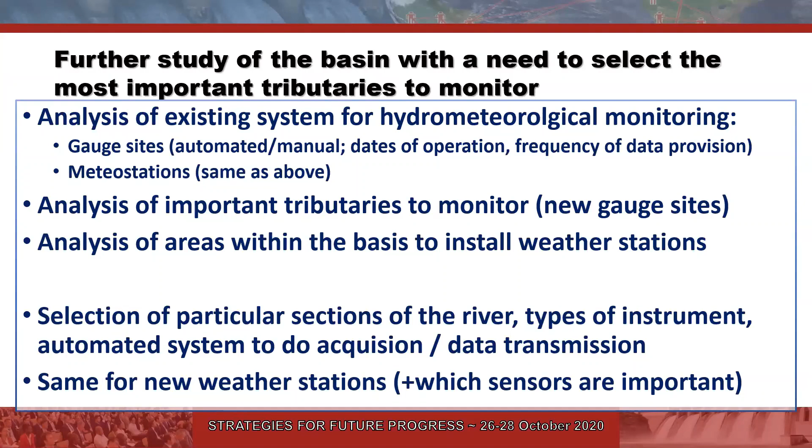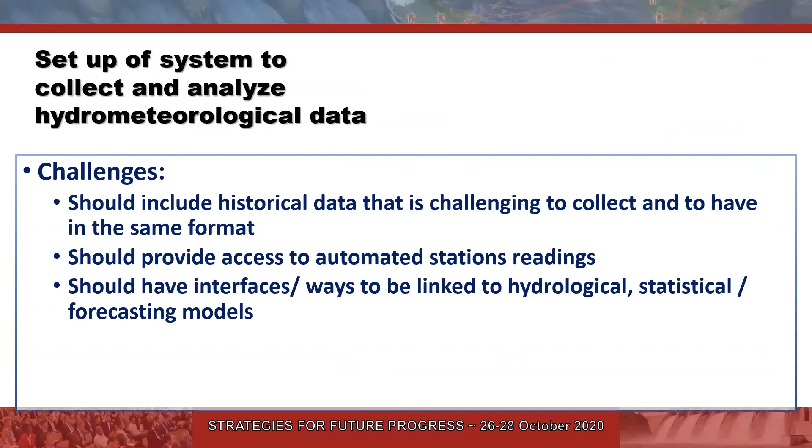This system allows you to have an interface, from one side, for this agency to provide you the data online so that it feeds your database, and from the other side, to have data that arrives from automated weather stations, automated gauging sites, to get this data and put it into your database online. Apart from that, there is also a forecasting system block that analyzes all these inputs, also gets data from forecasts of weather - temperature and precipitation - and this forecasting system provides you the estimation of the flow.

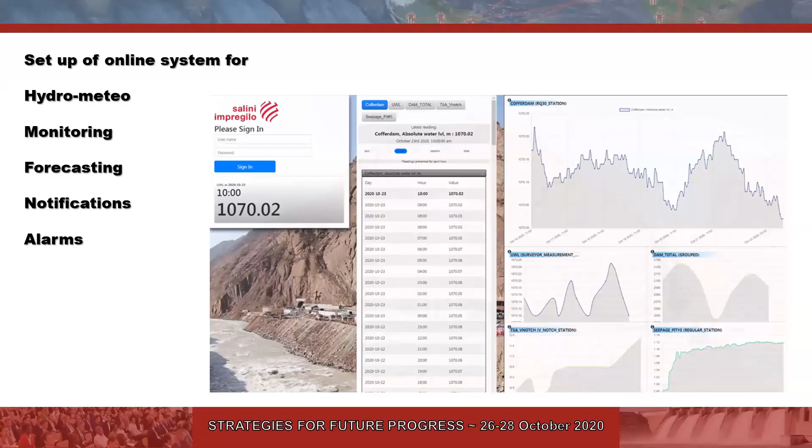One part of the system is creating an interface that is easy to use by people from different fields, so they are provided with passwords to access the data they need. And if we proceed even further, to the construction stage, this system, as soon as it starts working with these automated stations, makes it quite easy to integrate monitoring data. Also important is not only forecasting, but also notifying people about observed parameters, and an alarm system which allows you to set an expected range for each parameter you collect data for. If a new value that arrives is out of the expected range, alarms are triggered and people are notified automatically.

I realize that the topic covered is very general and very hard to cover in just one presentation, but...